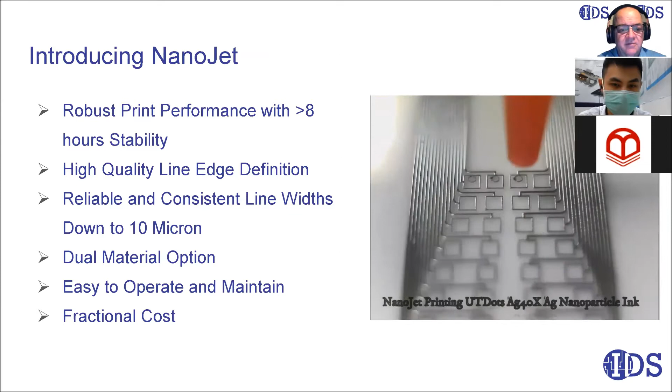The NanoJet technology provides robust print performance, and we've demonstrated more than 8 hours of consistent runtime without operator intervention and very stable operation. Because of the way the aerosol is collimated, we get very good line quality, and reliable, consistent line widths over the 8-hour period.

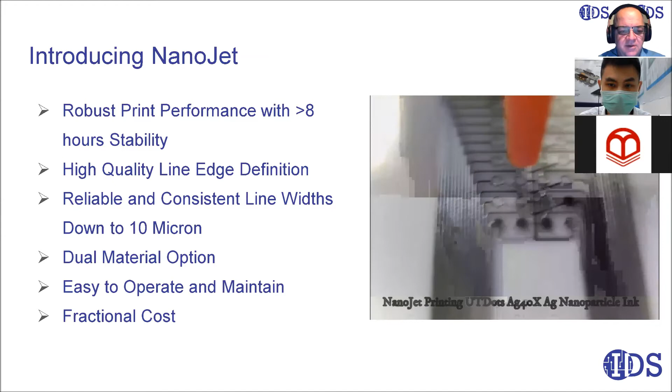We can print lines down to as small as 10 microns and up to maybe as much as 200 microns wide. We also have a single material or dual material print option where you can print more than one material from the same nozzle.

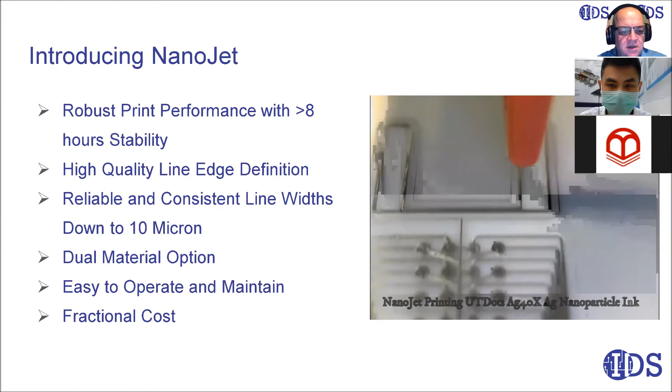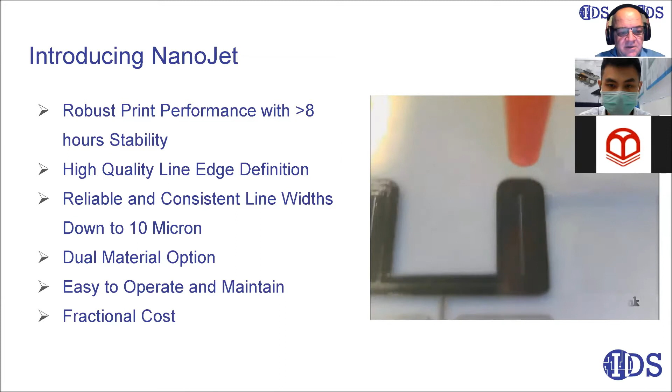Through the simplification of the aerosol print design, we've made the system easy to operate and maintain, and provide a significant cost reduction compared to the first generation aerosol printing technology.

The aerosol printing technology can be used in a lot of different application areas. We can print conductive materials, dielectric materials, and a variety of other materials. Conductive and dielectric materials really provide the opportunity to print multi-layered, multi-material circuits.

We're also looking at printing semiconductor interconnects, and in one application we're trying to replace wire bonding, where you transition the circuit from a soft substrate to a hard substrate, where wire bonding can damage the soft substrate.

We're also able to print the conductors and electrical circuits for molded interconnect devices. And the technology has a unique capability to print up over vertical surfaces, so we're looking at 3D printed interconnects as well.

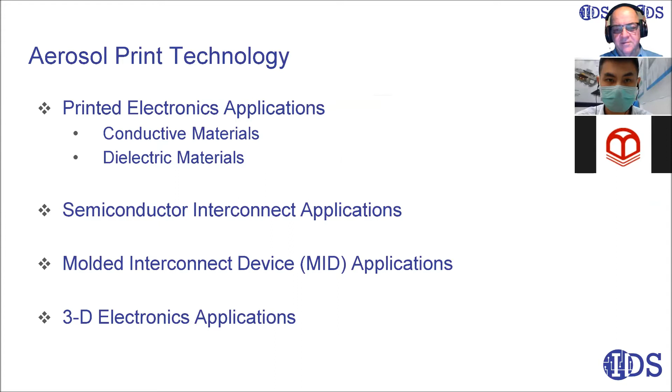What we've done is really try to understand the technology better. Most aerosol sources are polydispersed, meaning they have a broad range of droplet sizes. We leveraged a technology from Sandia National Laboratories that uses hydrodynamic and aerodynamic focusing and multiple lenses to collimate the aerosol stream very well, which provides really good printed line quality.

We were also able in our design to minimize the travel of the aerosol stream, to make sure there's very few points for material collection that typically would lead to overspray or satellite droplets. That's sort of the basis for the NanoJet technology.

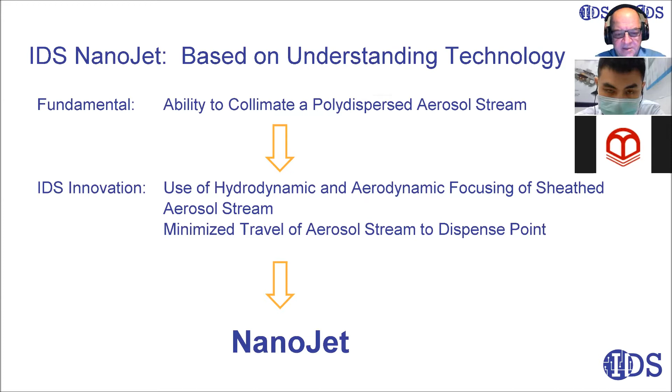One of the innovations of the NanoJet print technology: the print head consists of 3 major components. There's a removable ink cartridge that contains the aerosol, the ink, and it's where the aerosol is created.

The atomizer base has the transducer, the ultrasonic transducer that provides the energy to create the aerosol within the ink cartridge. The flow cell has the focusing elements to focus the aerosol to a fine stream for printing. The atomizer base also provides the attachment point to the motion platform.

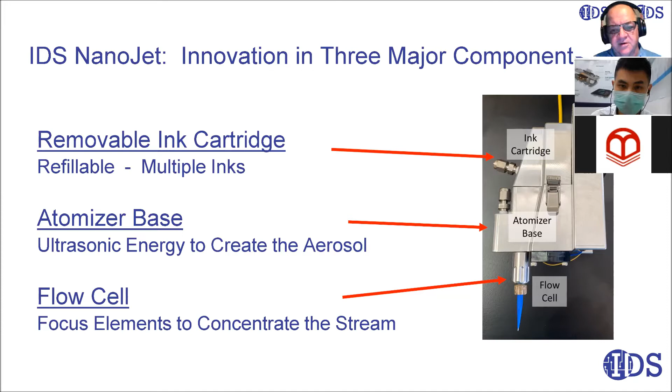The aerosol is generated inside the print cartridge, which inserts into the atomizer base. Since there are no external feed lines for the aerosol, and there are unique features within the ink cartridge, there's really little chance for clogging to occur within the print head.

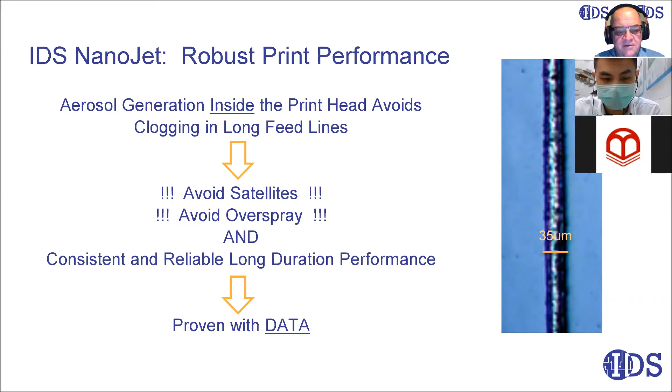Using that design, we've been able to avoid satellites and overspray. The design and minimum travel length for the aerosol really gives us a long runtime and reliable performance over long periods of time. We've done a lot of work to understand this and collect data to validate and support our claims.

So we actually have run a lot of stability tests. A lot of the early stability tests we ran on the print head were 4-hour tests. More recently, we've run several 8-hour print tests. In this particular case, we actually used the 4-hour test and just ran it twice. Once we finished printing, we ran it again.

The print parameters are shown on the left here in the table that we use for printing. Our test procedure was that we would establish the optimum printing conditions, then clean the head and make sure there's plenty of ink, and then start the print head printing. We would move to a park position where we would dump the material into a location.

We continuously flowed the ink through the head for the entire 8-hour test period. Periodically, we would print lines for analysis after the print tests were completed. Once the print tests were completed, we would cure the samples, and then do optical analysis of the printed lines to measure the width, as well as to measure resistivity of the printed lines.

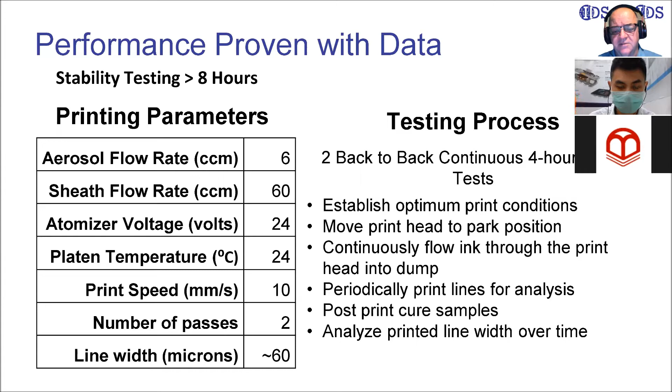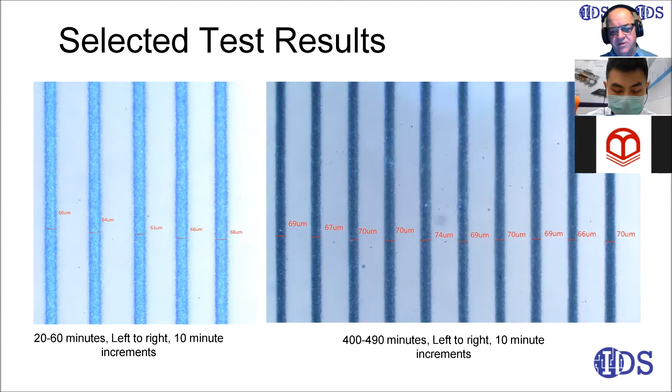These images show some of the printed line quality that we're able to accomplish on our 8-hour test. The lines on the left show the printed lines and measured line widths for the lines from 20 to 60 minutes. Each set of lines is printed every 10 minutes. On the right, it shows the printed lines that were printed towards the end of the test. You can see there's maybe a slight change in the printed line width, but it's pretty consistent for the full 8-hour period.

So we actually plotted that. We measured the line widths on this data, and then plotted the data on the graph shown here. It was nice that we did the two 4-hour tests. It shows that there's an initial phase, the areas circled in red, where there's a little bit of instability in the print head where it has to warm up. But then once it warms up, you actually get very consistent printed line widths over the entire 8-hour period.

So we measured the line widths to be an average of about 68 microns. The statistical analysis showed the standard deviation to be about 3.7 microns, and the tolerance on the printed lines was about 5.5%. We felt like this is a pretty good test and pretty good performance for the print head, and we repeated this test multiple times.

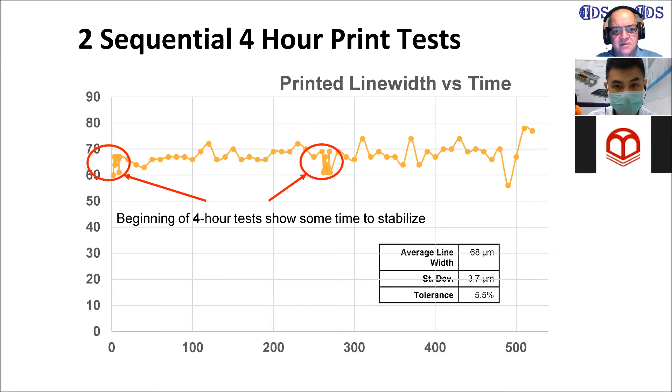We use 2 different focusing techniques: a hydrodynamic approach coupled with aerodynamic focusing. What we licensed from Sandia Labs was the fact that we can use multiple aerodynamic lenses in the system to collimate the entire aerosol distribution. The first lens collimates the largest droplets, the next lens collimates the droplets in the middle, and the third lens collimates the droplets in the smaller sizes. This really gives us superior line edge quality.

One of the unique attributes of the aerosol printing is that the distance from the nozzle to the substrate can be between 1 and 5 millimeters. This allows you to print over surfaces with a lot of topography. We also have an internal shutter that we've patented, which allows us to keep the area around the end of the nozzle clean and free so that you can access tight spots and stuff.

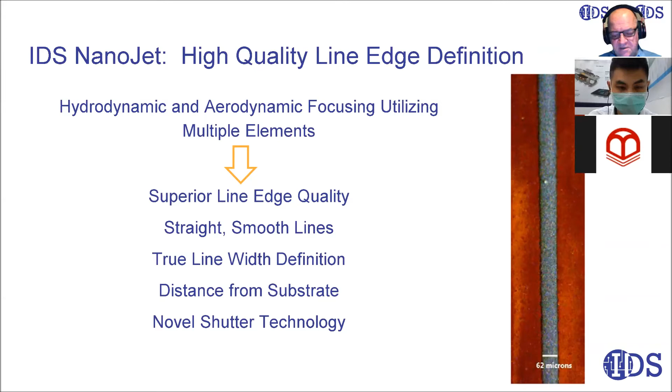We're continuing to evolve the technology and improve the print performance. The lines shown here on these images show recent results using a humidification technique to really help prevent the droplets from drying out. So we get really crisp line edges and no overspray or satellites to speak of.

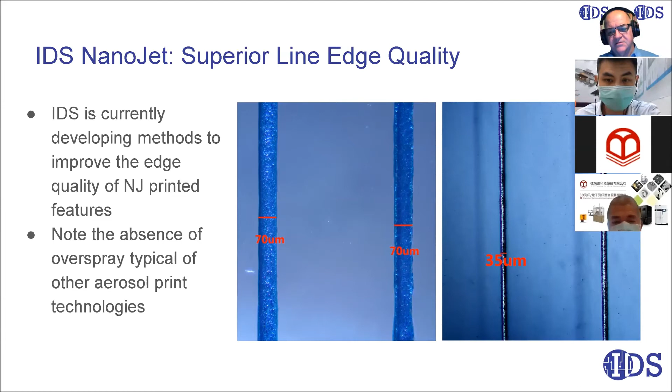This is a circuit that's printed for an implantable device stimulator. It shows some of the finer line features as well as how the internal shutter works. The printed narrow lines on the right are about 30 microns wide.

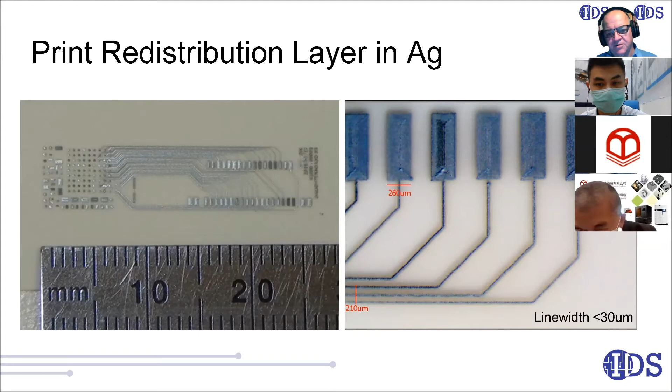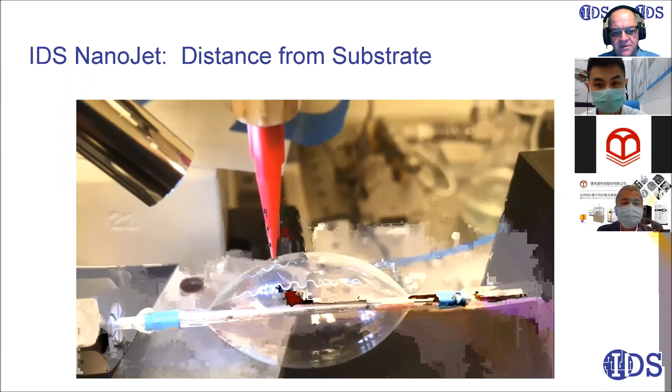This image or video shows printing over a polyurethane membrane or bladder. You can see that the working distance between the nozzle and substrate is several millimeters, and the beam is collimated, so it's relatively insensitive to focus position. This shows the capability to print over non-traditional structures and surfaces.

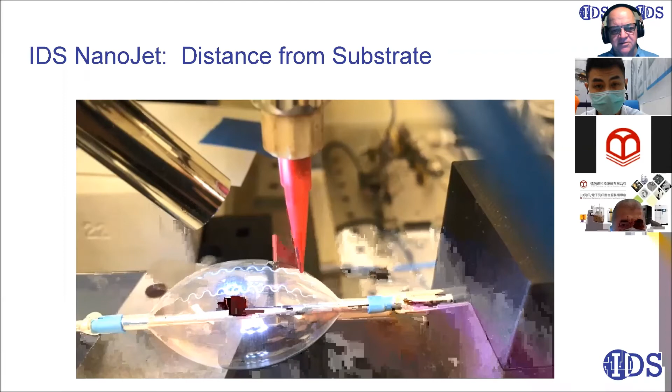The removable ink cartridges are unique to the NanoJet technology. The cartridge is a self-contained ink reservoir, and all the aerosol generation occurs within the ink cartridge. The ink cartridge is inserted into the atomizer base.

The ink cartridges facilitate a quick changeover. If you're doing production and run out of ink, you can pause the process, replace the cartridge with a full one, and maintain it offline. It's easy and safe for operators to service the cartridges, and the dual material configuration allows both conductive and dielectric materials to be printed from a single head.

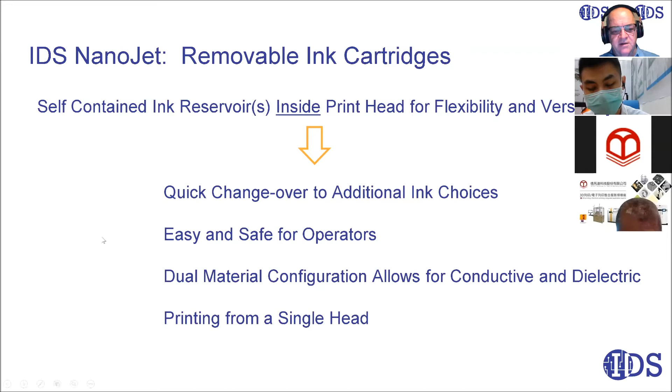This slide shows in the middle the print head with the ink cartridge and the flow cell separated from the atomizer base, showing how it can be disassembled into components for servicing or cleaning.

There are a couple of clamps on the side of the cartridge that allow it to be removed, and an air inlet line that has to be removed. Similarly, the flow cell on the bottom, where the focusing occurs, can be unscrewed from the print head and serviced and cleaned separately.

The images on the right for the ink cartridge and the flow cell show how they can be broken down into a few components that can then be ultrasonically cleaned in a solvent or fluid, blown dry, and put back into service.

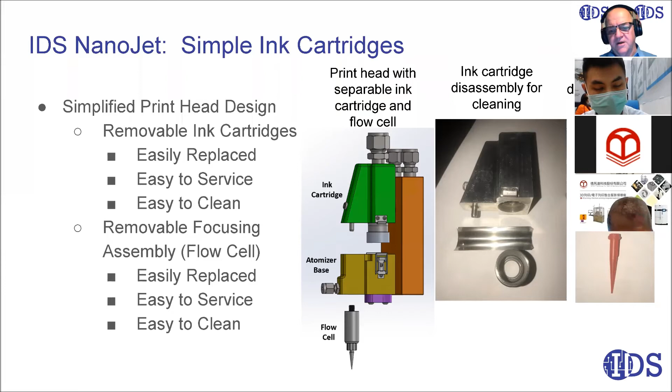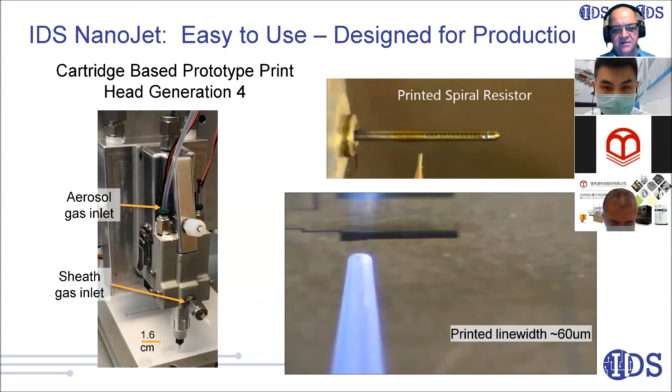What really helps with the print head reliability is that there is no external plumbing to transport the aerosols. There are features within the ink cartridge itself that allow the aerosol to be reused and recollected into the ink reservoir, so there's very little place for aerosol to get trapped, form a puddle, and ultimately lead to clogging. That's one of the unique attributes of the system.

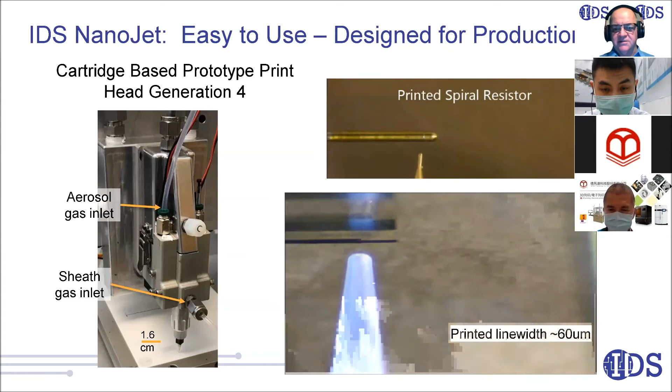The video on the right shows printing of a spiral resistor onto a 750 micron diameter pin, used for an accelerometer sensor. The video on the bottom shows printing of about 60 micron wide lines for a redistribution circuit. Again, for both of these, there's a lot of working space between the nozzle and the printed substrate.

Because we've been able to simplify the design considerably, the NanoJet technology is quite economical. We've been able to lower acquisition costs for customers, and that's a real benefit. The operating costs are low too, since the system is simple and doesn't require a lot of time maintaining, servicing, or cleaning.

The mean time between failure, we believe, meets industry expectations. The system is easy to integrate and operate, and adapts to most motion platforms.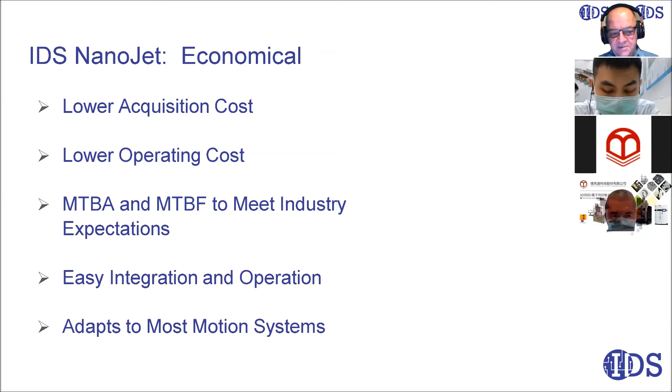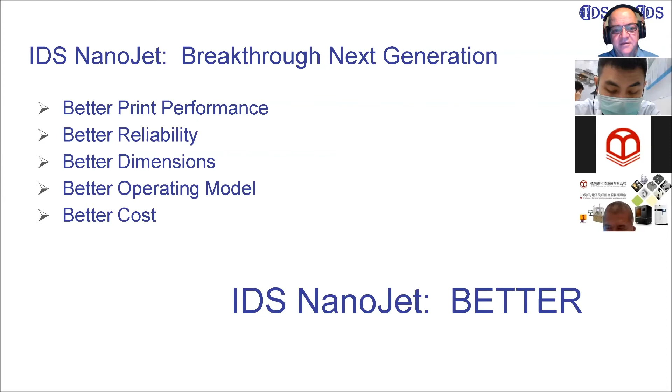No, thank you for your presentation. Do you want me to stop sharing? Thank you for your presentation. You're welcome. Anyone have a question?

Yeah, David, I have a question about your NanoJet. Did you hear? Hello, I can't hear. Yeah.

I saw your presentation and your PPT shows that replacing the ink cartridge is very easy. Did you calculate the replace time, the time to replace it for one cartridge swap? So the time to replace the cartridge and stuff? Yes, it's less than a minute. There are two clamps on the side and one gas line to replace the ink cartridge. So it's a minute or two.